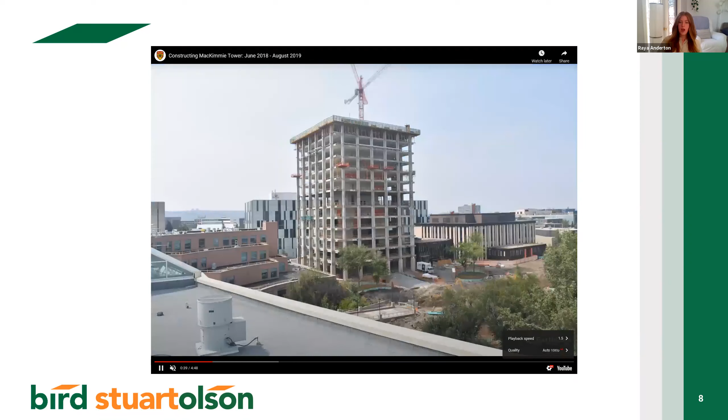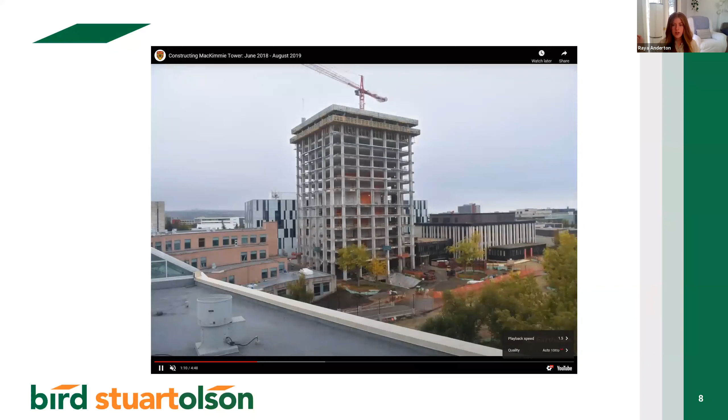The adjacent building actually does get demolished in the end - not shown in this video - we end up just starting from scratch for the Block and Link. To refurbish the tower, they ripped down the concrete facade and removed a lot of the building services so that it was just that core structure you see. The tower was extended by 3 stories up.

It was prepared for a double skin glass facade, which provides comfort and plenty of light in the building during the daytime. Then they built photovoltaic systems - just solar panels on top of the roof - and integrated that into the roof design. Their plan was they were aiming for a net zero carbon building.

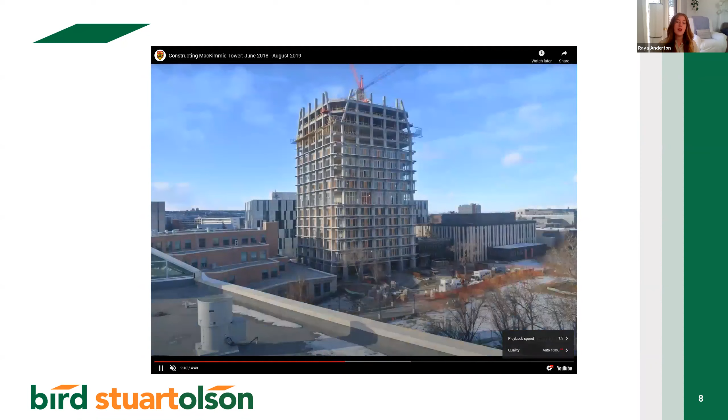One of the challenges was an inefficient cladding system that led to really poor thermal performance. So the plan was to create a double envelope system, and I'll show you some of the ways they were able to pull that off - along with adding PVs, photovoltaics, just solar panels, which were actually able to power a lot of the adjacent buildings as well.

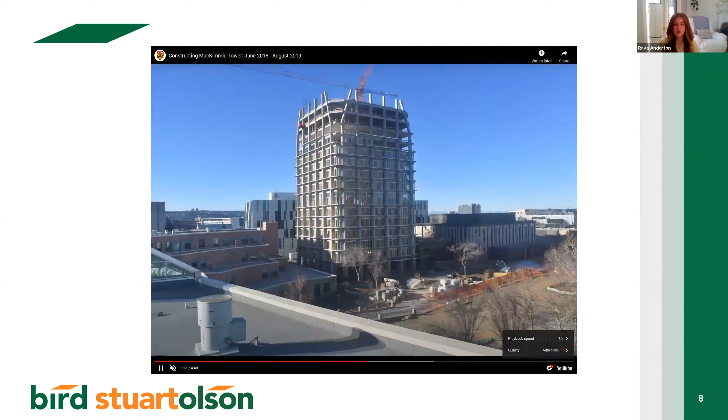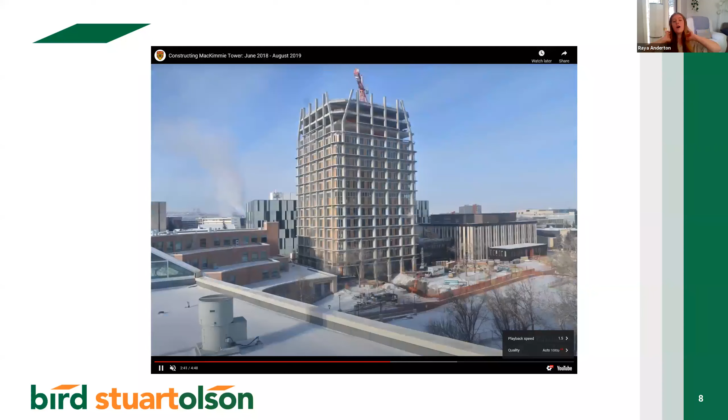So it's automatically controlled, this double facade. Now it's finished and it encloses the entire building. But one of the things you can do with the passive temperature control of the double facade is this thing called night air purge.

Does anybody know what night air purging is? You guys might not know the term, but I'm guessing a lot of your dads do it, because my dad would do it all the time growing up.

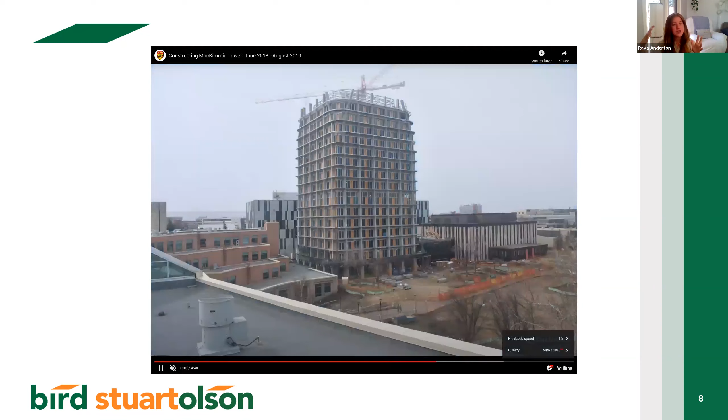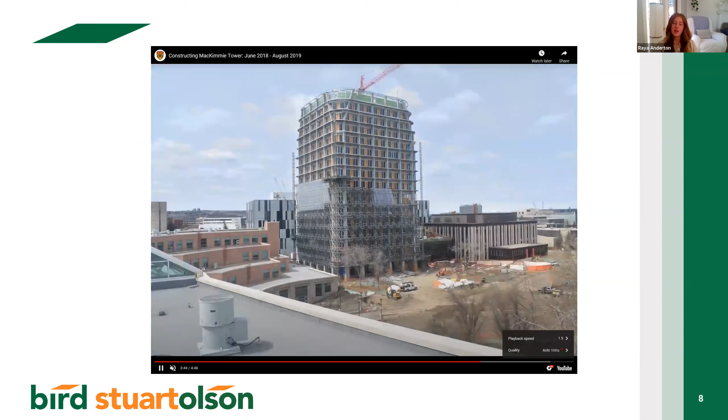It just means closing all of the windows and curtains during the hottest parts of the day in the summertime, and then at night when it cools down, opening all the windows and turning on all of the fans. I don't know if you guys had a similar childhood to me, but my dad was a little bit type A about making sure it was really cold at nighttime so that in the daytime it would not be as hot inside the house.

So basically that same principle is being applied right here to the double envelope facade. You can see the building's already enclosed, but when they add the glass to the outside, they're able to improve thermal performance. On a really hot summer week, we've got nighttime temperatures of about 14 degrees, so they actually automatically open up all of the windows during the nighttime, and call it night air purging.

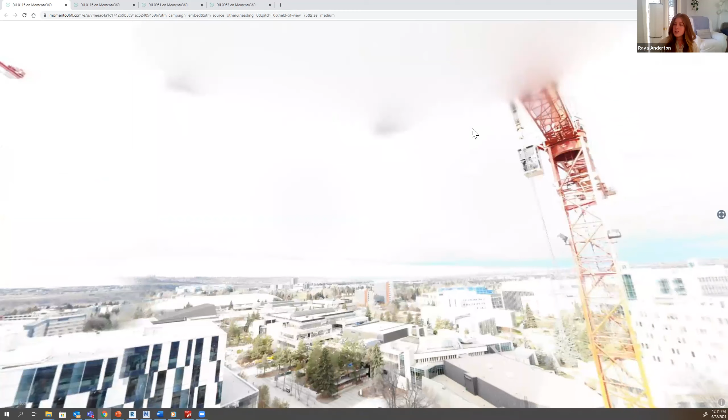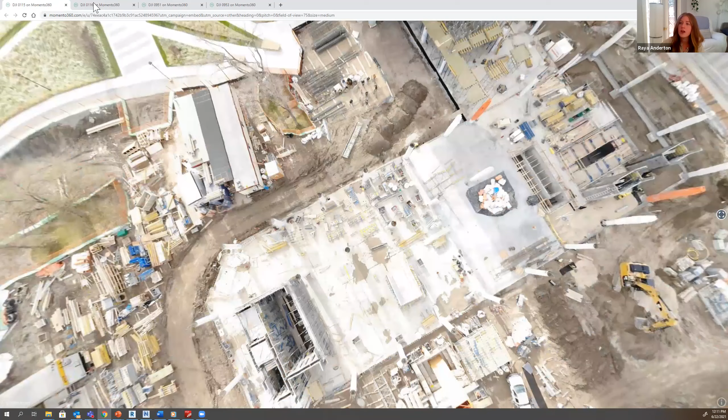We're currently using some drone footage and we're able to show the site as it progresses. This was our last drone flight, unfortunately, because now we have 2 cranes going at all times, and it costs a lot of money to shut a crane down, and you can't really fly a drone when a crane is operating actively. We haven't been able to get any more recent images, but here's an example of some of the drone footage we're able to take, along with another shot closer to the ground. This was back in November, 9th I believe, and you can see we've poured the concrete structure, with a lot of material on site and preparation of the link happening as well.

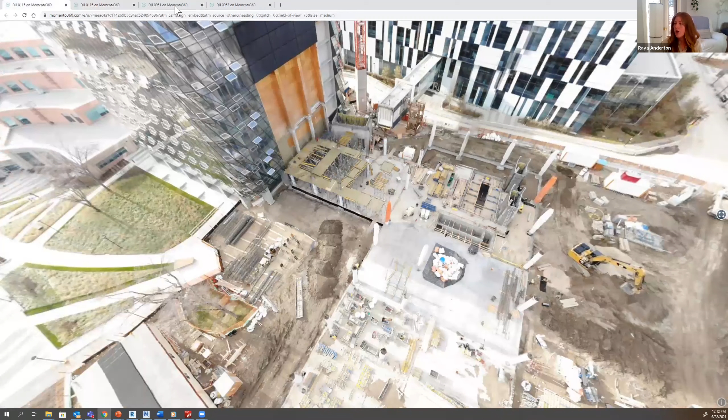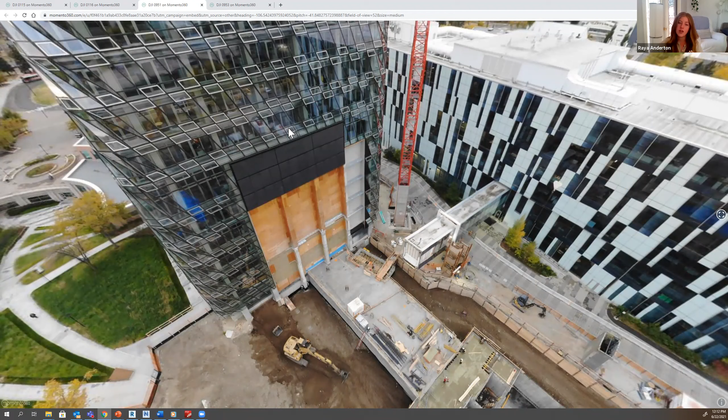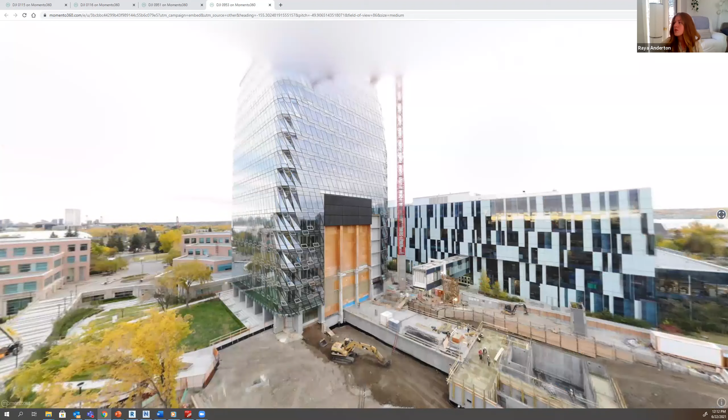One of the things we've used during construction is drone footage, just to show the client how progress is going. When you have enough flights, you can stitch them together to show a video as it's going - we have that drone capability. For this particular project, because of the constraints, it was actually easier to have a stationary camera on a building nearby, which is the video you just saw, but we do have drones on site that we're using for other things as well. That's an example of one of the softwares we're using - with drone mapping, you can create high resolution photos and show construction progress.

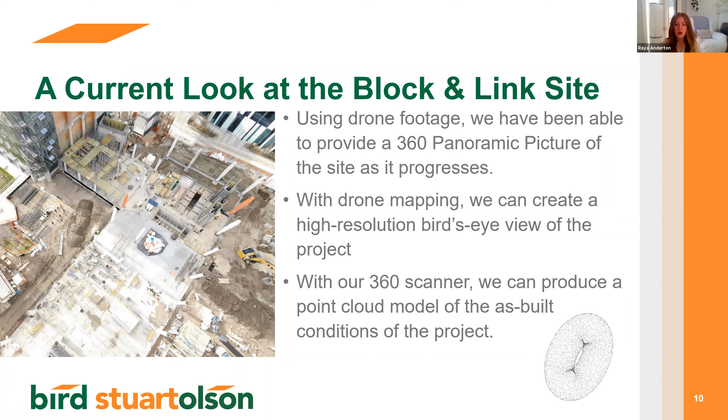That's what it looked like in November. We're actually at the 4th level already structurally, so we've moved on quite a decent amount since then.

Another thing we've been using in addition to the drone is the BLK 360. It's a scanner that I don't mind, though there are better ones out there, and we're looking at potentially acquiring an RTC 360 from Leica next year, which is just a better quality. So I'll preface it by saying it's not the best quality.

But it's what we can use for enclosed rooms, we can take 360 photos. We can also develop point cloud models. Have you guys learned yet about point cloud models at all?

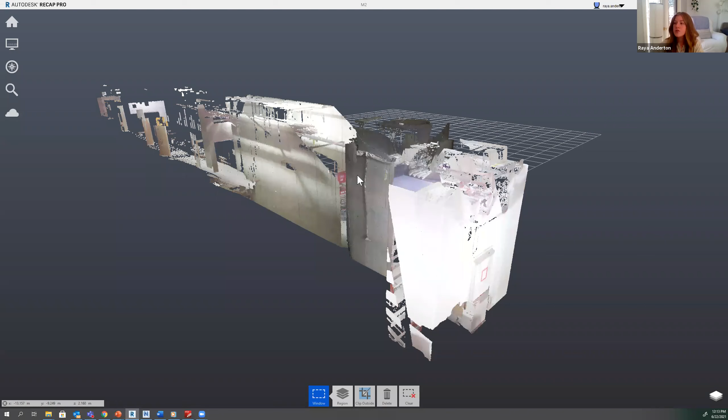All right, so this is something that you guys actually have access to with your educational license. It's called Recap Pro. I don't know if you guys have Recap Pro, but I know you have Recap Photo. So if you guys are interested in creating any sort of point cloud data systems, you can reach out to me. I'm sure Will actually has a scanner that he'd let you borrow if you were interested in that.

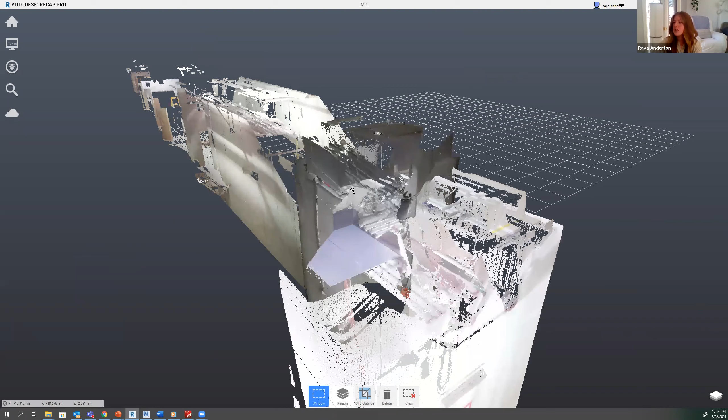But this is one 3D scan. So the difference between a scan of a photo and a point cloud model is, and you can kind of see as you zoom in, that this isn't a surface. It isn't a smooth surface right here. It looks like it is when you zoom out, but it's actually a bunch of dots.

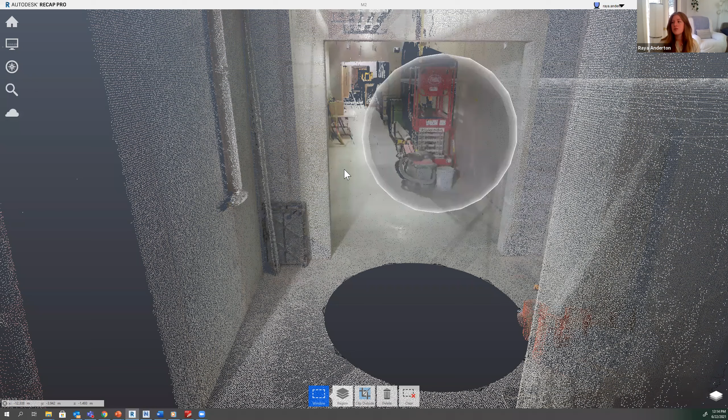What happens is the scanner is set up right here and it emits a bunch of points of light, basically lasers that bring back a distance reading. So you can combine - this is basically what the scanner saw at the time. For example, if you set it up in just one place and have it scatter lasers all around it in a 360 view, this is kind of what you're going to get for your 3D view. You're going to get as many points as it was able to see from its starting point.

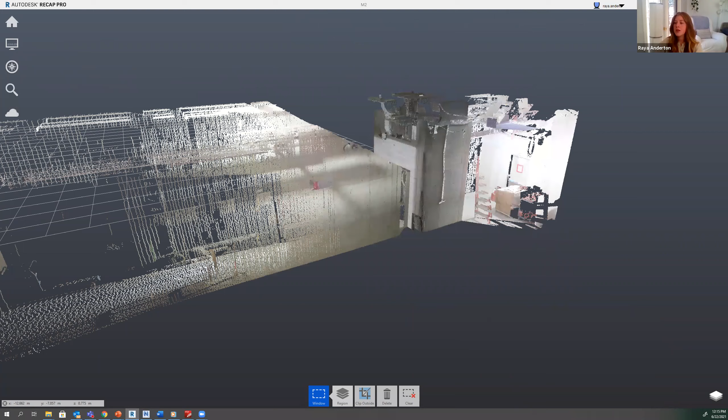A great example of why you need to do more than just this one is right here. You can see it was set up just before this opening. So we have that straight line there where we can't see anything above it. To create a little bit more detail, what we do is we set up the scanner, scan it there, then move it over here and set up probably another scan right about here. It's able to fill in all of that missing data up on the ceiling right there. So 3D scans are another way that we provide as-built data for projects.

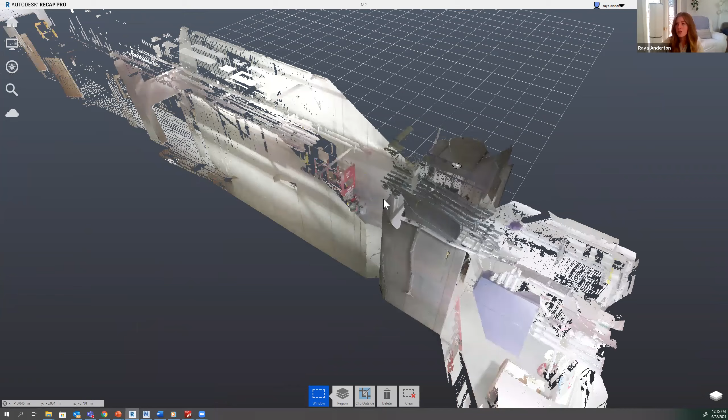And this is just one scan. I couldn't pull in the other one just because I'm running so many programs at once and didn't want to crash it. But you can stitch them all together and end up with a very smart model. From these point cloud models, you can actually create models in Revit or any other modeling software.

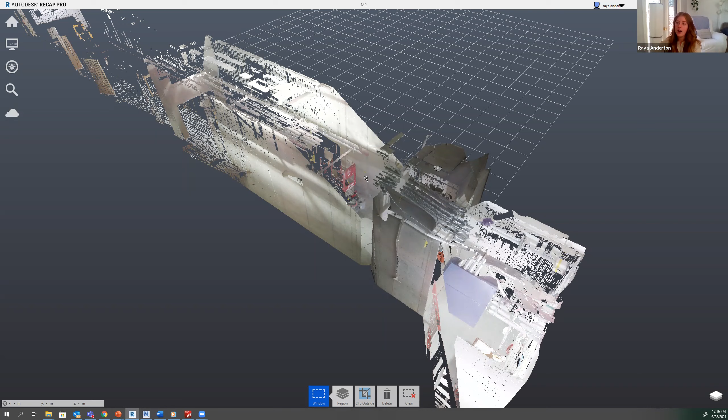So that's just a look at Recap. There is a way, if you guys are interested in figuring out how to use Recap Photo and don't own a drone, for those of you that don't own drones at home, I have a step-by-step instruction manual that I developed - just kind of a for-fun thing - if you're interested in taking Google Earth images, because Google Earth already has the satellite footage for what you're looking at. If you take it, you can actually create a model of the space you're looking at. I did one for the Eiffel Tower, and it's pretty cool.

So that's the scanner that we're looking at and the drone. Those are kind of the hardware that we're using right now in our project's delivery on site for the McKinney Block and Link project.

So the software in project's delivery right now, from my job's perspective, what I'm using almost 90% of the time is Autodesk Navisworks Manage. Autodesk makes a lot of different programs, and a lot of them you guys have access to right now if you're curious, but Manage is the one that I use. Last year I did a lunch and learn or some sort of educational session where I showed you guys how to use Navisworks Manage to do clash detection. If you're interested, I'm sure there's a recording buried somewhere about that. This is a very powerful tool that you can use to interlay multiple different models into one specific space.

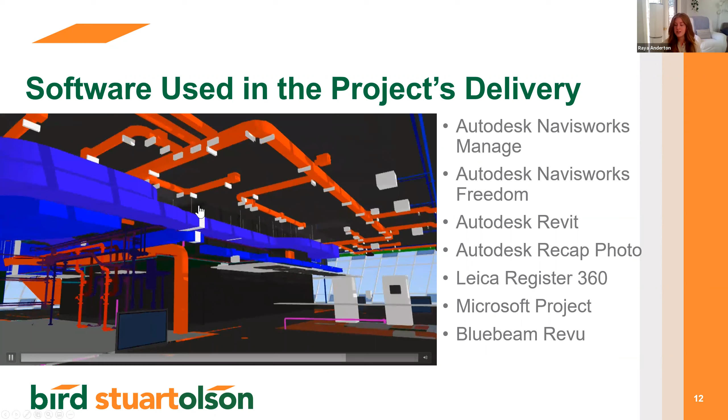We also use Navisworks Freedom. That's what we get basically all of the trades that don't want to pay for Navisworks Manage to use, because, as you can guess, it's free. So Navisworks Freedom is what we use to do all of our coordination meetings. Also Revit gets used, Recap, which you just saw, and Leica Register 360, which is a software used to register all of those scans.

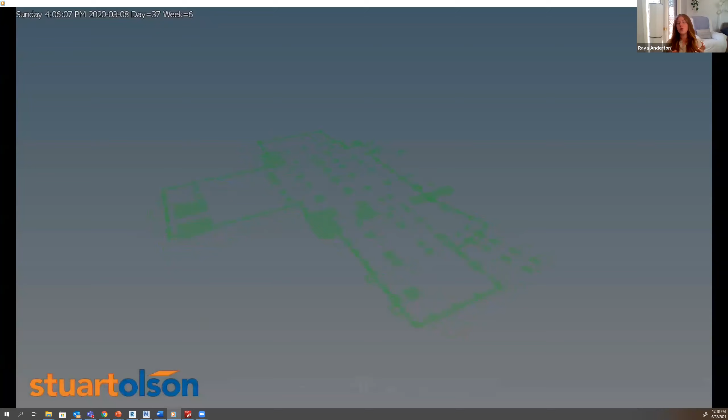Microsoft Project is a scheduling software, but what we can do is actually add a project's schedule to its model. This is a different project entirely, but I did just a really quick first pass. What you end up getting, when you're able to add each individual element to a line item of schedule, is you're able to create an animation. So this is called a 4D animation, for the fourth dimension of time, where you can see the building get built according to its structure.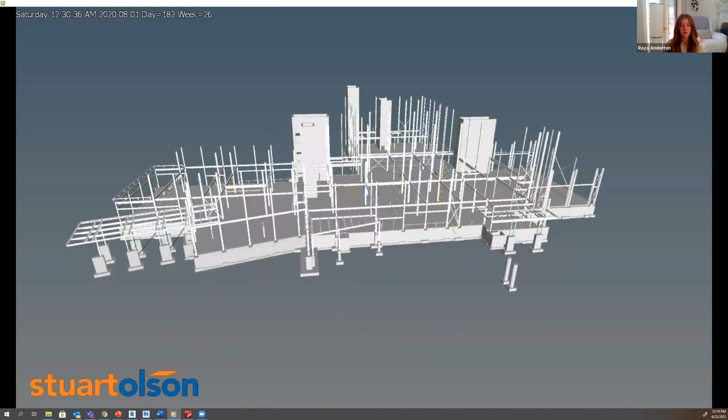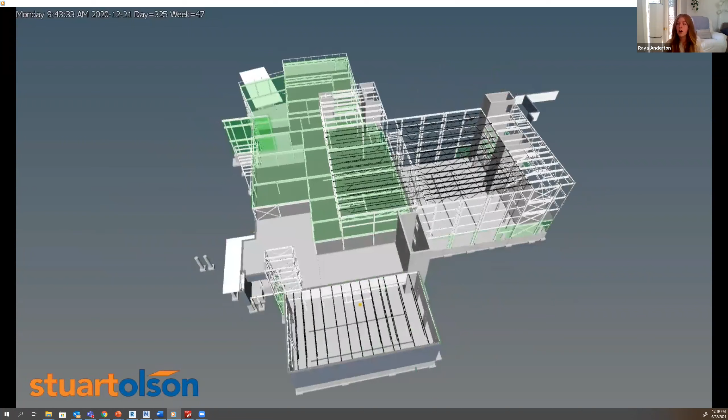So why is that useful, except to have a pretty picture? It's useful if you're looking at a particular area and you've developed this really intense schedule, and then you want to play it. If you're playing it and you see that your concrete gets poured and then your underground's going after, you'll obviously notice that's wrong. You have to have your undergrounds laid first, and then you put your concrete foundations on top. So there's a lot of things you can check to make sure it's correct. It's basically just a double check that we use, we call it a dress rehearsal for a building.

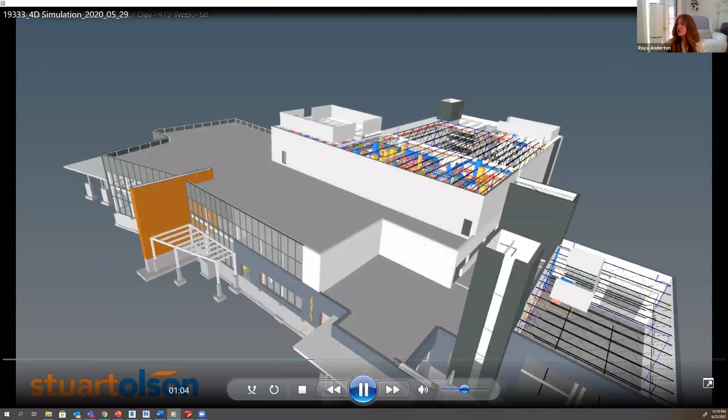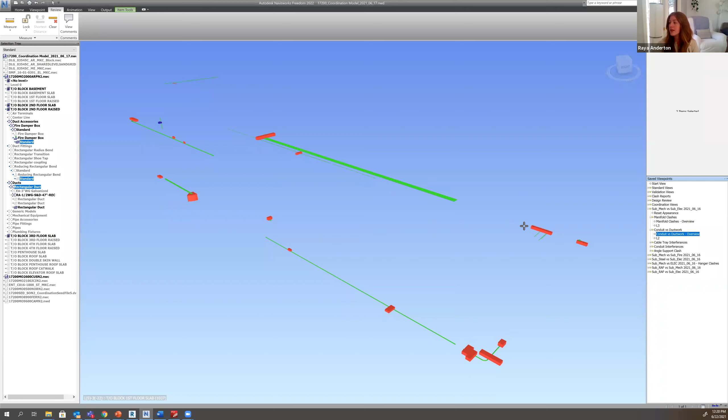So this is one example of something Navisworks Manage can do. Navisworks Manage, let me close this. It can also, as I mentioned before, do clash detection. So this is the model for the Block and Link only. This is the Block building here, and this is the Link here. As you can see, we can also do clash detection checks. Right now I'm in the process of working on clash detection on the Block and Link, and in our last meeting on Thursday we found one of these clashes. The new model coming at the end of today is going to have this moved over.

So a couple of things you guys will probably use if you ever joined a company that needed a VDC coordinator: most of the time you're going to be using the clash detection tool from Navisworks Manage, and also the timeliner tool, which is what you use to make animations. So that's just a quick look at the software we use.

So for a day in the life of my job, you can see this picture of our weekly trade meetings was developed before the pandemic. We no longer meet all crammed into one site trailer anymore, but I have a weekly meeting. Every week I deal with this particular federated model. As you can see, I've moved the tower out of it just because it got really heavy.

And we deal with all of the clashes, and we discuss them, and we work on how to fix certain things that are laid in certain ways. It's just helpful because before this existed, we were just doing coordination on 2D drawings. So when I say we, I mean they, because I was very young. But before clash detection became a thing, we were looking at drawings and hoping that if there was going to be any issues, someone would catch it before it got constructed.

This resulted in a lot of problems. Before clash detection, let's say someone poured a concrete column in the wrong spot, and structurally it can't be where it is. If it was modeled or drawn in the wrong spot, and poured, then instantly it costs $100,000 to rip out all of that concrete and re-pour it in a new space. It causes delays in the schedule, lots of delays down the road.

So this is something that we've been using in the last number of years just to save money on every project, and it's shown very, very useful. Clash detection is something that I spend most of my days doing. Back to the spreadsheet, I want to make sure I'm showing you guys all of the things I wanted to show you. So yeah, we've got our clash detection, and that's basically my day in the life.

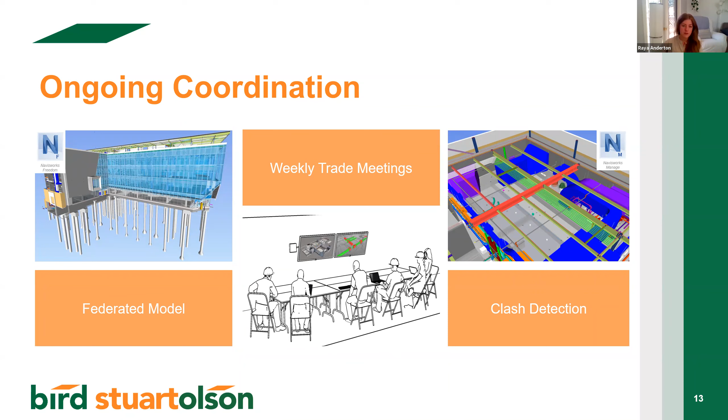Because this project was commissioned back in 2016, 2017, there wasn't really that much BIM mandated at the beginning. So now that we're going into 2021, they're asking for a lot more, which is great, because from the beginning we've been using all of this stuff for coordination purposes. So now we can actually give it to them as an as-built record model, even though it's not perfect, because this is something we can give them above and beyond.

So this project is going to be complete in 2022. It's going to consist of the tower, which is already done, and then right now we're just at the concrete level of the block and link building, which is going to be educational facilities and offices and things like that.

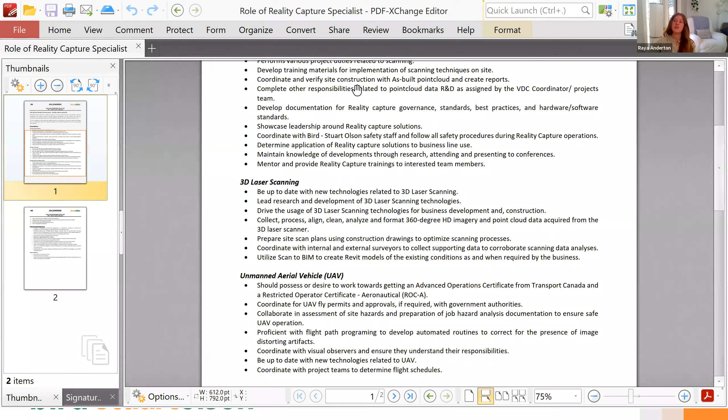I'm also just going to show you real quick what we have so far for the role and responsibilities of our reality capture specialist. So this is right now what we are looking for.

Can I just interrupt you, Raya, for a minute? Perhaps I should mention that if you're looking at what you want to do for your capstone in fourth semester, there's a whole range of choices. I'm not sure who of you have been exposed to those choices, but VDC, Virtual Design and Construction, is one of those options. William Thompson is in charge of that, and that's the capstone that both Raya and myself took. So anything you're seeing today that's really interesting - taking that scheduling, putting it in 4D, working with clash detection, or the drones or the point clouds - if you like that kind of technology, that's the way to go for you.

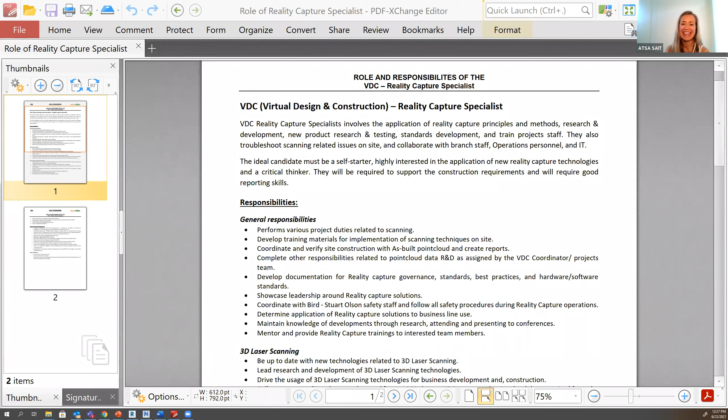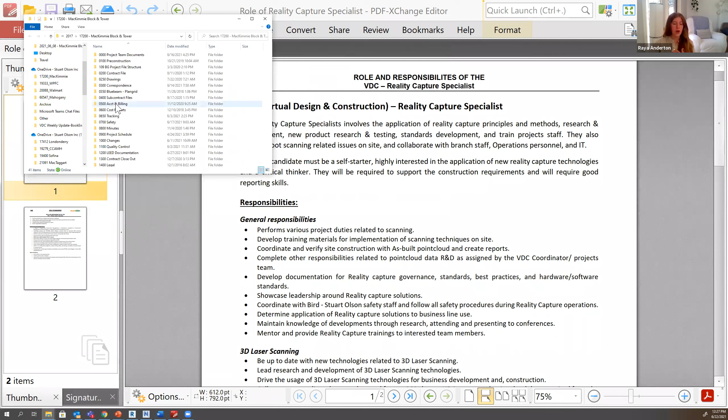So sorry, Raya. No, that's good. You know, it's actually kind of a shame, and I wish it wasn't true, but I didn't have the option of the VDC coordination capstone when I was in school. So all of the knowledge I was able to get was during a 4-hour conversation I had with Will after I graduated, right before I was about to enter the job market. I feel like he's really setting you guys up for success if this is something you see yourselves pursuing in the future. One of your questions was how big are the models?

I'll just show you real quick how big just the architectural model is. It's not crazy, but when you combine them all together, it's pretty intense. So we're looking at about 680 megabytes for just one of them.

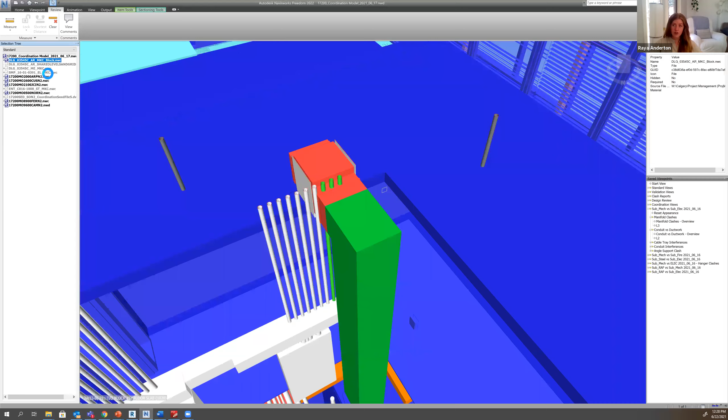When you combine all of the models together - and I've actually reduced the numbers here because it was more - we're looking at architectural, mechanical, electrical, and then all of the trade models. So we've got models that come in from our different trades: RPs for mechanical, Custom for electrical, JCI doing the fire, and Norfab doing all of the steel. So there's a lot of stuff that ends up getting in there, and it gets quite heavy.

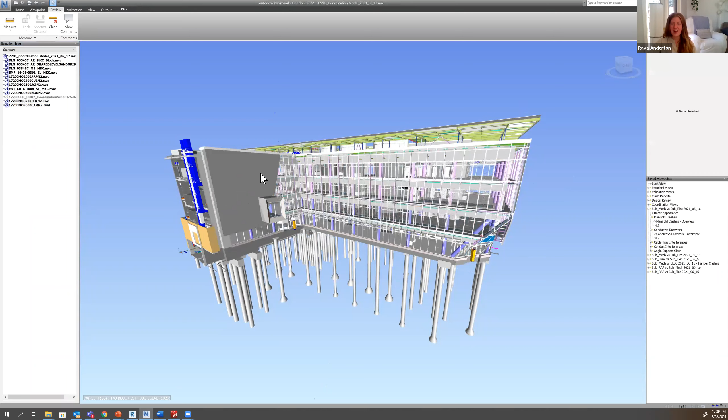Any more questions? Oh yeah, I'm sure Matt's class for scheduling is everyone's favorite. Sorry, Matt. Do you guys have any more questions about this project? I really wanted to kind of breeze over it fast enough that you guys could voice your questions or opinions.

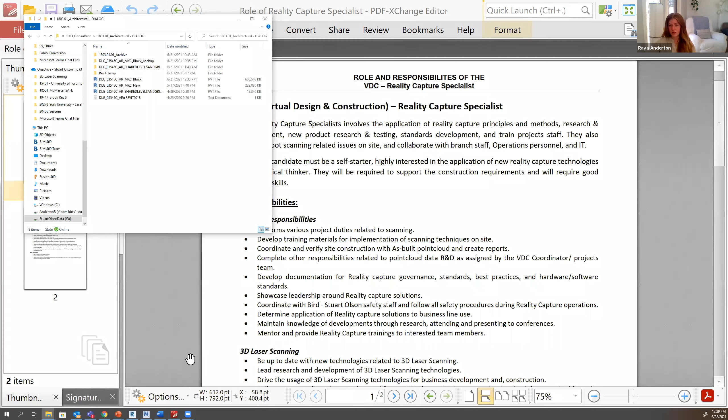This is basically my presentation. That's kind of it - I just wanted to show you guys the jobs that we're looking for in the future and kind of what is being used right now on projects. Does anyone have any questions about any of these softwares or hardwares or anything like that?

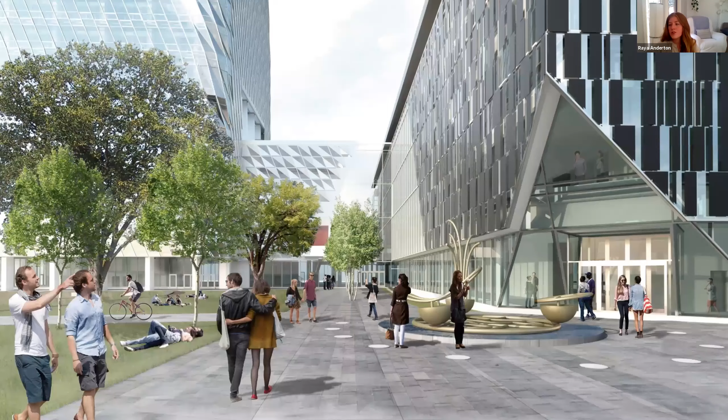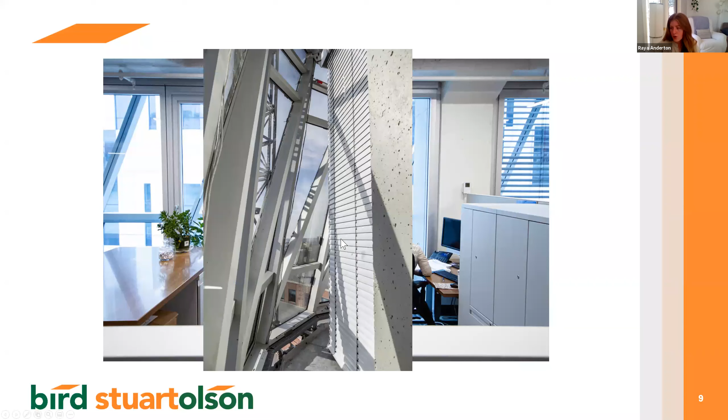I'm going to ask you, Raya, not specifically about the software, but just about the new facade on the building you're working on. What's the distance between the facades? It almost looked like you could walk in between the two - can you do that, or is it much smaller than that? Yeah, I can measure it - I would measure it if I had it open. There's actually, and that's why I didn't really want to call it a balcony, because it's still enclosed in glass. Up here on the 13th, 14th, 15th floor, you can't walk out. But over on one of the office levels, there's actually a door you can open and step out there. If anyone knows what the building code is off the top of their head, they might be able to get a better idea than me.

That distance, I think, is probably a couple feet, like maybe 3-4 feet.

These platforms and programs with VR, that's actually a really good question for VR. I am obsessed with VR and AR software. There is a program right now I've been using for a different project that has an interoperability tool with AR and VR. The software is called Revizto. I think Will has at least mentioned it in his VDC capstone, if he hasn't already shown them. I don't know what the educational license situation is with that. But there are a lot of different platforms emerging now that have interoperability with VR and AR.

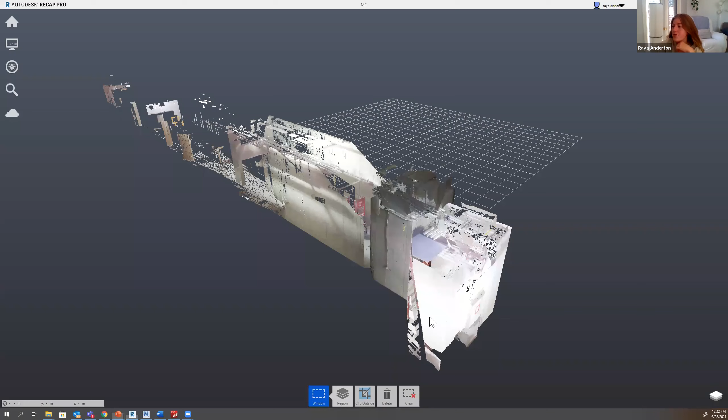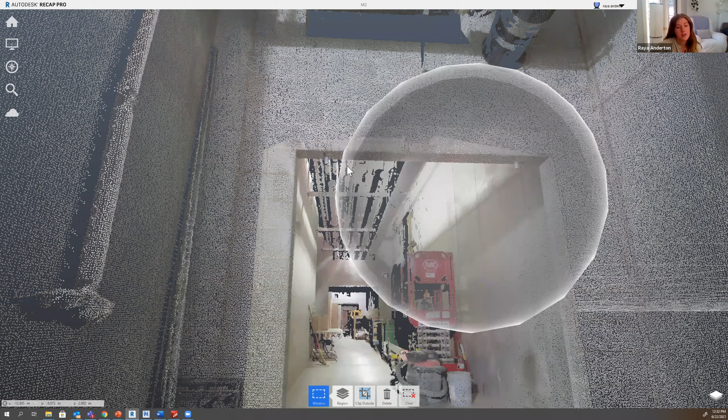As of right now, we've actually extensively researched the pros and cons of bringing VR and AR on right now. Trimble actually makes an augmented reality hard hat headset sort of coupling system. You can go out onto site, put these goggles on, and see superimposed on reality exactly what the model looks like. Imagine you're out here in the basement of this project, standing right here, but with the goggles on, you can actually see this pipe is supposed to be right here. You can see all of the studs, and this is maybe not the best example, but you look up and can see all of the stuff that's supposed to end up in the ceiling, especially before it's actually put there. So there is stuff that exists right now.

The reason we have not brought it onto this project is just because we were a little bit further along before we had been introduced to it. Another thing is you kind of have a bunch of trades that you need to get a little bit more buy-in from before you can start putting augmented reality into projects, at least as a mandate. But what I'm anticipating is in the future, as that becomes more of a second nature tool, it's going to be used a lot by trades.

So the mechanical trade is going to come in, and instead of referring to drawings or even referring to a model that's inside their iPad or laptop, they're just going to be able to stick on their headset, which is going to show them the entire building. Let's say it's just the concrete structure that's poured, and they'll be able to look up and see where they need to have their holes drilled. They'll be able to see exactly where all of their pipes need to be laid. Even if they shake their heads, it'll stay there. So it is something that exists, something I'm super excited to become more normal in projects. As of right now, it wouldn't necessarily be us that would drive it as much as a trade would drive it. I think we are going to see that in the next 5-ish years for sure.

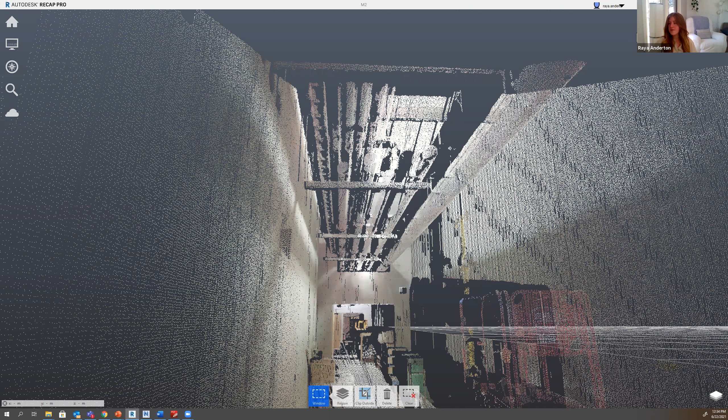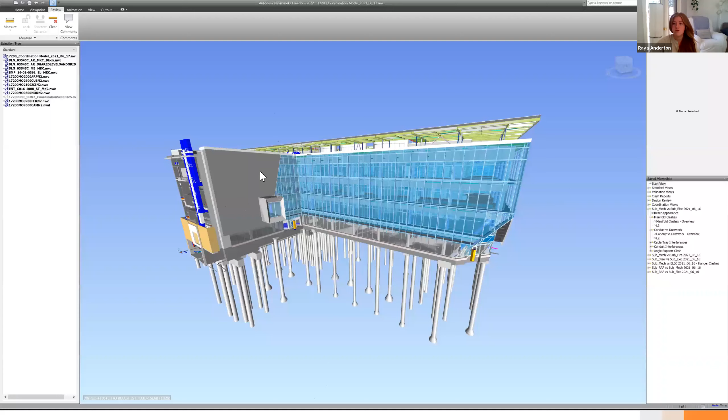But for now, this project didn't get to use it, unfortunately, which is a bummer because I wish I could have used it. Then VR, virtual reality, is typically used more on the proposals side, just because you can take this whole building and actually walk through it and see it in the VR world. But in addition, people want to see more of a real value for that instead of just being able to interact with it inside goggles instead of just looking at it on top of their screen. The big difference there, they want to be able to see it in dollars.

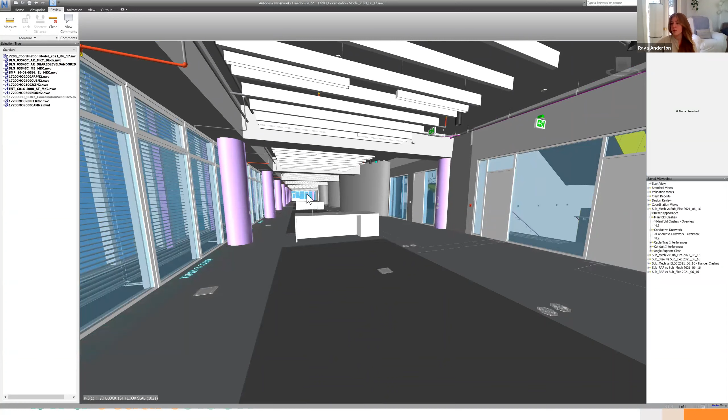They want to see, okay, if I want to be able to walk through this in the virtual world with a pair of goggles, how much more valuable is it than just being able to look at it on my laptop? Once that can be proven, we'll be able to have a little bit more. I think by then VR is going to be a lot more part of our lives. But there are still a lot of companies that do it. I believe we have VR headsets. I'm probably going to get one before the end of the year just for myself that I'll start using. But yeah, that's kind of where we're at with this.

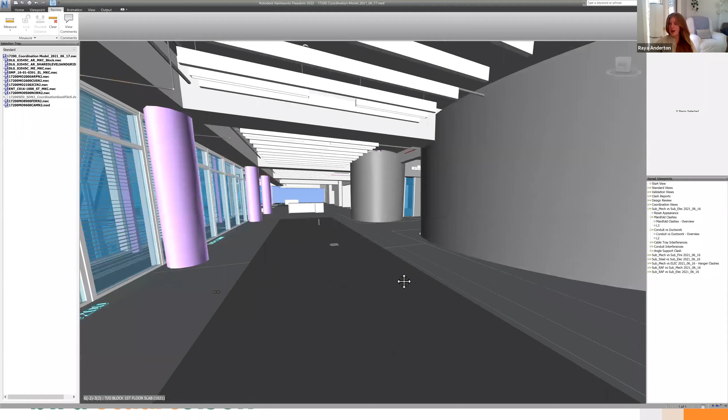And Tirza, I'll just give you a general idea. Now, we wanted to build that double envelope facade because it actually makes sense to build it. It wasn't just some design challenge that we wanted to solve. It was actually very useful.

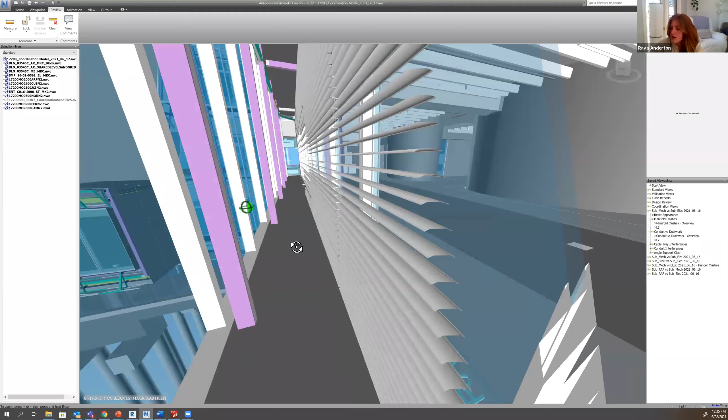So from the glass to glass, actually, maybe we'll do glass to glass. Yeah, it doesn't look like that much of a distance, but it's about a meter approximately that it comes out.

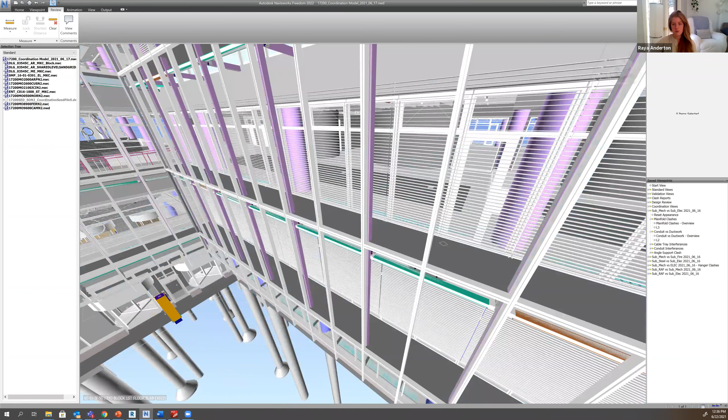Yeah, any more questions? It looks like it's enough to walk there, which is actually really cool if you have that option. Yeah, it is cool. I think if I were ever to work at the U of C, it'd be cool to have an office like this where you could just go out and get a tan. Just kidding, you wouldn't really get much of a tan out there.

Are you asking if the space, that balcony space, is usable? I just assumed it wasn't, but you're saying you can go out there. There's doors that open up and you can go onto it? You can, but it's so narrow that, I mean, especially because it's not like a house where you would go and put out some patio furniture and have breakfast out there. You can go out there, but it's not usable, like you couldn't put a desk there and work there, I don't think. How neat. Yeah, but you can stand out there, which is very cool.